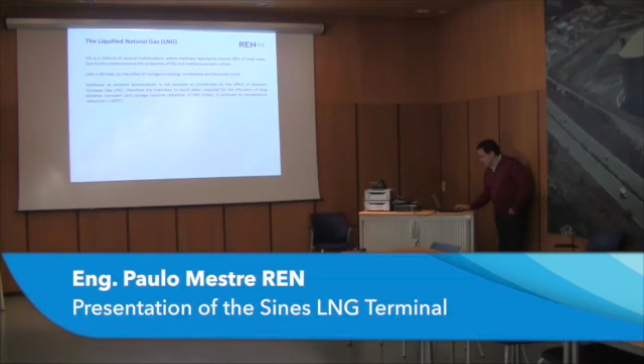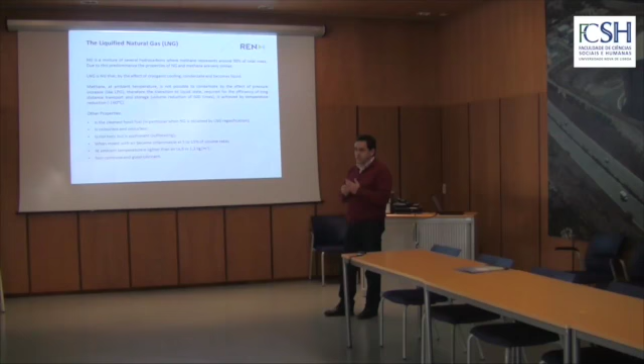Okay, so in this presentation I start here with these slides about the natural gas. Namely, what is natural gas? Basically, natural gas is a mixture of hydrocarbons, where methane represents about 90% of the total mass of this mixture. Then we have ethane, about 5%, and then all the others are around 1%.

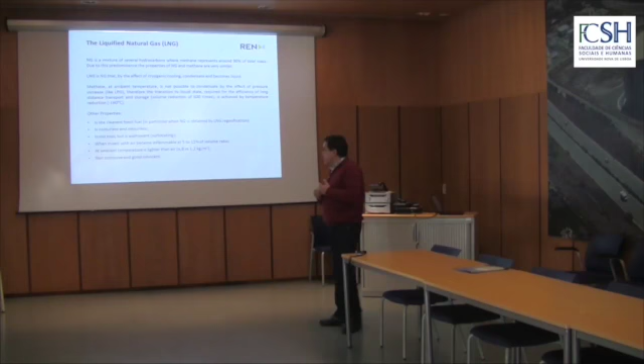LNG is the natural gas that, by the effect of temperature reduction, becomes a liquid, so it's in the liquid state. Methane at ambient temperature is very difficult, almost impossible, to condense. We would need a very high pressure, above 300 bar.

So the way we have to put this mixture, the natural gas, in the liquid state is by the reduction of temperature. We do this to have an effective way to transport and store it. Because when we put the gas in the liquid state, the volume reduces about 600 times, which is much more effective for storage and transport.

Other properties: it is the cleanest fossil fuel. It is the one that, in terms of emissions of CO2, particles, and NOx, has the lowest emissions. And in particular when the natural gas is obtained from LNG, because the liquefaction process removes some of the contaminants that we have in the natural gas that comes by pipeline.

It is colorless and odorless. It's not toxic, but it is asphyxiant. That is, if we have this gas in such a concentration that it removes the air that we have to breathe, then we can asphyxiate with this gas. When mixed with air, it becomes inflammable. The ratio is about 5 to 15% by volume.

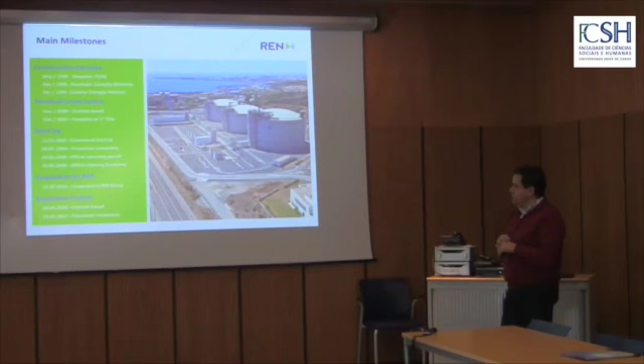Then, in the beginning of 2006, we put in the Portuguese law a European directive related to the unbundling. And this European directive stipulates that the companies that have assets of natural gas, terminals, pipelines, underground storage, cannot have the commercial activity in the same company. So at that time, we were segregating from the company that had the commercial activity. The commercial activity stays in the Galp group, and we were bought by REN, and since then, that was in the end of 2006 in September, we moved to the REN group, and we are in the REN group since then.

More recently, in 2009, we make an expansion of our facilities, so we have another construction project, an expansion. You can see here in this picture, the original project was these 2 tanks and this process area that we have near the 2 tanks. In the expansion project, we built another tank, the 3rd tank, and this process area that is also near the 3rd tank. Basically, it's like building a terminal in parallel to the existing one. It was also a project of 3 years, so we end this project, the provisional acceptance, it was in 2012. Okay, so this is a little bit about the milestones of this facility.

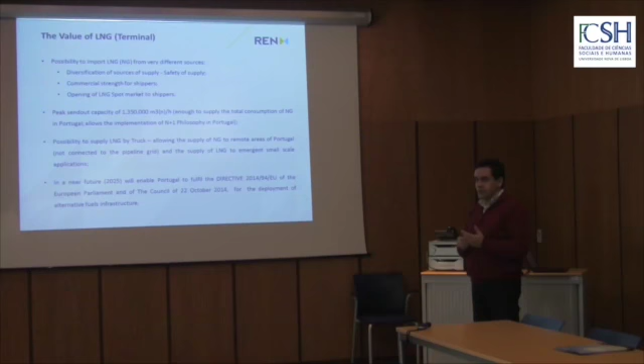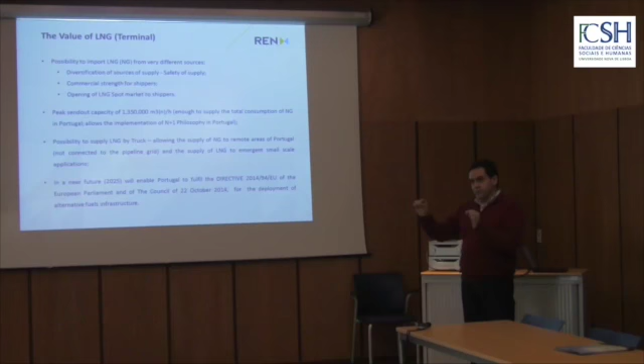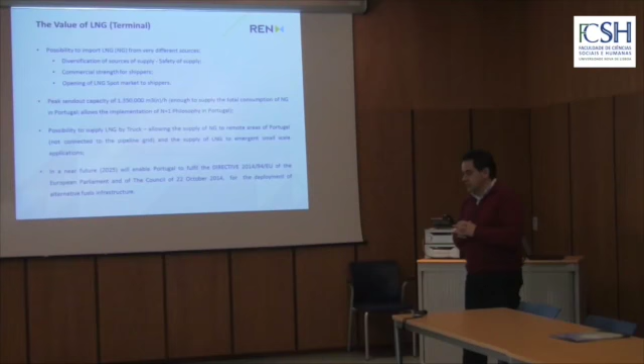Referring a little bit the value of the LNG and the value of this plant for the Portuguese natural gas system. Before the terminal, we have one producer that is connected to the Portuguese system. So we are connecting a producer to a consumer by a pipeline. So this system, it's very weak, because if we have some problem in this system, we compromise the supply of natural gas to Portugal.

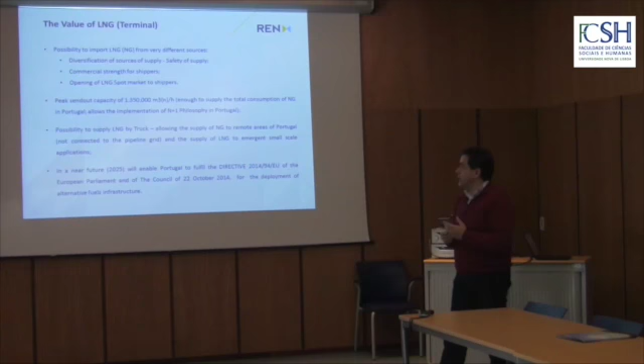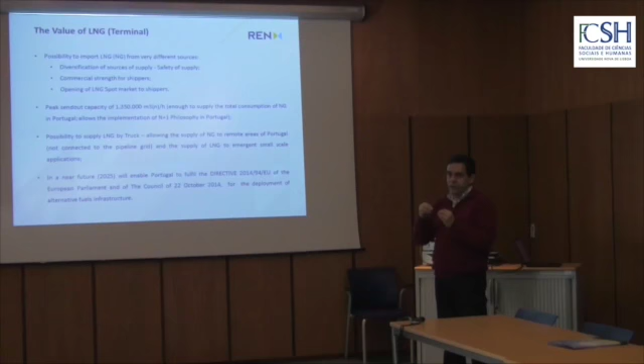With the terminal, we create a new entrance of natural gas in the country, with the particularity that we are no longer linked to a certain producer. We can import natural gas in the liquid state from whatever source. We can go to all the sources of the world, because usually the composition of the natural gas is very similar around the world. And in Portugal, we have our spec, that is what limits the gas that we can put here in the terminal. It's a little bit wide, so we can receive natural gas, I would say, from any source of the world. And by doing that, we are diversifying the sources of supply, and we are increasing the safety of supply.

This is also very important for our shippers. The shippers are the people that have the gas. We are not the owners of the gas in this plant. The shippers are the ones, like Galp and Endesa, that bought gas in the market and put the gas here in the terminal. This is also very good for them, because in the past, they are limited to one source. We only have one source. So you can imagine that in commercial terms, this is not very good, because if I need to buy something but I only have one supplier, this is not good for me.

With the terminal, my shippers can go all around the world to make the business, they can buy gas in whatever source. So they have the power to negotiate the prices of the gas. They also have the possibility to go to the spot market to buy gas in this spot market. And usually the prices of the spot market are lower than the prices of the long-term contracts. And by doing that, we create a way to have gas at a cheaper price here in Portugal.

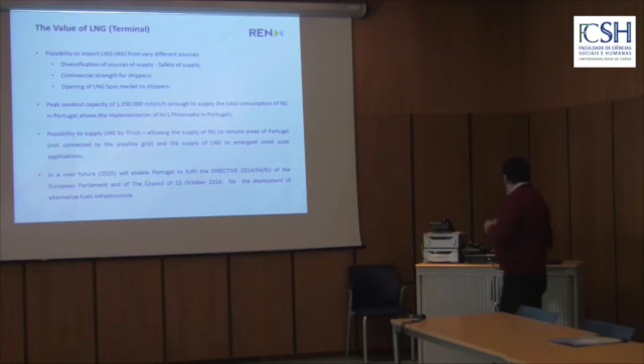This possibility also prepares the country for these new markets that is the small scale. So these are new ways to consume natural gas, namely the transports: heavy trucks by road, or the maritime transport that can consume the natural gas in the liquid state. But this is also applicable to any other possible solutions that are related with this new market of the small scale.

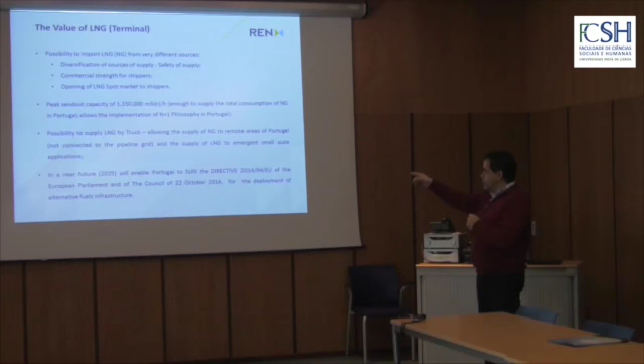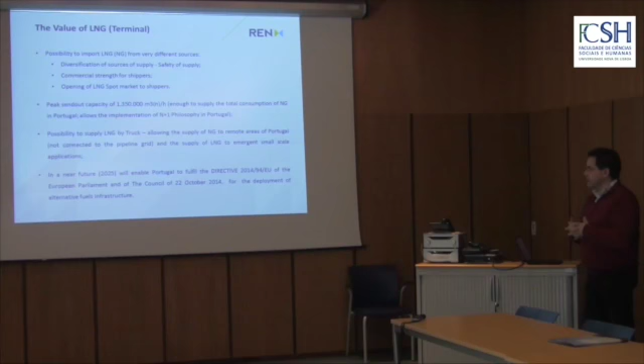Another important feature is that in the near future, this is for 2025, we will enable Portugal to fulfill this directive, the 2014/94, that stipulates the deployment of alternative fuels infrastructure. Namely, what it states is that in Portugal we should have capacity to supply LNG to power the ships and to power the heavy trucks on the road. On the roads we should have these filling stations no more than 400 kilometers apart. In the ports we should have the main ports with the capacity to supply LNG as bunker fuel for the ships.

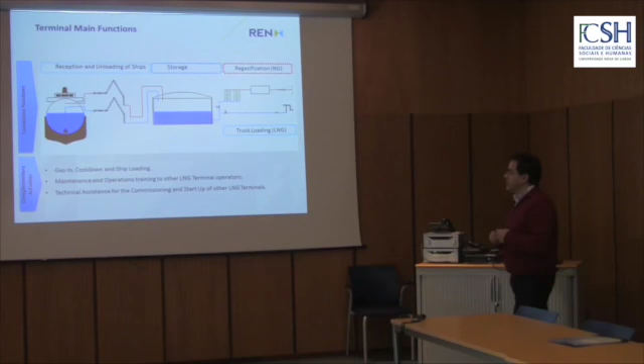In terms of the functions of the terminal, what are we doing here? Well, this is a regulated company, so we operate under the terms of a concession, and that concession stipulates the functions, what I call the concession functions. So it's the reception and unloading of ships, the storage, and the regasification to the grid. I add to the regasification the loading of trucks. This is also related with the concession.

Let me tell you that the storage here is not a strategic storage. This is only an operational storage. It's just to allow the continuous emission to the grid, because here we operate 24 hours per day, 7 days per week. So we need to have the capacity to put the gas in the grid continuously, but we are only receiving ships every 2 weeks or so. So we need to have storage to enable this operation.

More recently, we also implemented other activities that we call the complementary activities, like the gas in, cool down, and ship loading. Ship loading is the opposite of ship unloading. So basically, it's putting LNG that was in our tanks into a ship. We also perform some maintenance and operations training for other LNG terminal operators, and we also give some technical assistance for the commissioning and startup of those terminals.

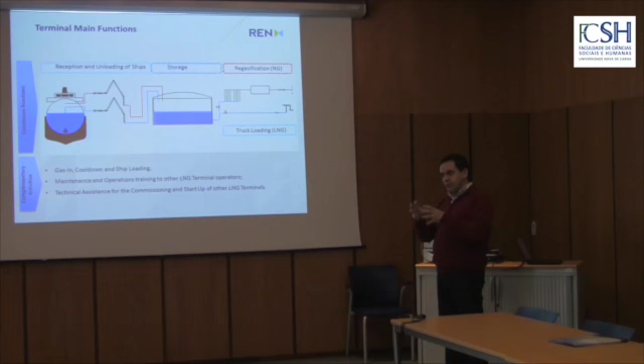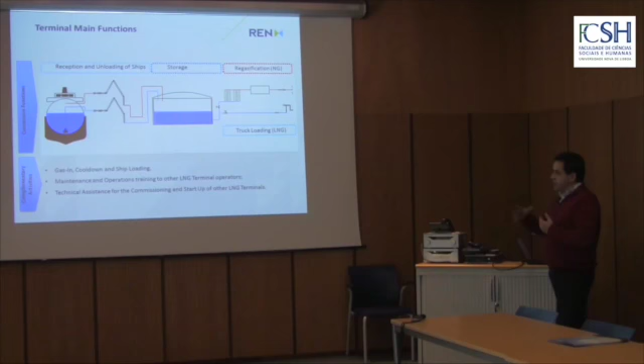This is something that after 2008, the first natural gas crisis of Ukraine, when Ukraine shut down the valves, most of the European countries decided to create a backup solution for their countries. And the solution that they had was to install LNG terminals. And we see LNG terminals being erected in the Netherlands. The European countries that have LNG terminals decided to build more terminals, like in France, in Spain. A lot of projects after that year appeared in Europe, and we gave this assistance.

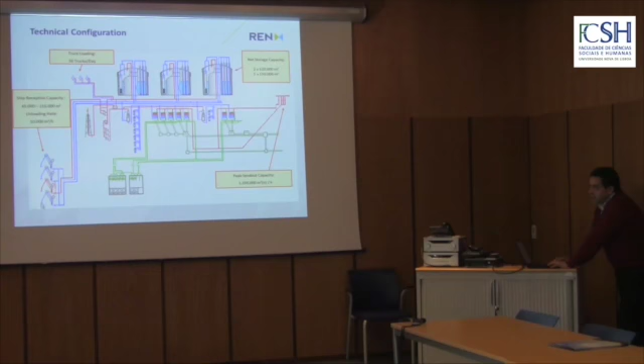In terms of process, let me just give you here a brief explanation of what the process is. So the unloading is quite simple. Basically we connect these equipments to the ship, 4 unloading arms, 3 are dedicated to the liquid transfer, and 1 for the vapor return. So we put here the ship, we connect the equipments, and we make the unloading to the tanks.

Well, this is not as simple as I'm telling here. The people of operation know much more about this than me. But this is done with a lot of attention to the characteristics of the cargo, the characteristics of the LNG that we have in the tanks. We decide if we make the transfer by the top of the tank or by the bottom. And all this process is much more controlled. This is not open the valve and go ahead.

Okay, in terms of storage, we don't need to do much. It's just to monitor the condition of the product that we have there. We have ways to monitor the characteristics of the LNG that is stored, namely to check if we have certain characteristics that indicate that we are having stratification in the tanks. Usually in our case, we never face this problem because the rotation of the LNG in the tanks is very, very fast, and we don't create the conditions to have this stratification. But anyhow, the operations monitor the conditions of the LNG to check if that is occurring or not.

And then the send out, the emission to the grid. Basically what we do here is the following. We pressurize, just a reference, the product in the tank is very near the equilibrium, okay? Especially the top of the tank, this layer that is here on the top, I would say this is really near, or at a certain point it is in equilibrium, like we saw before in this small vessel. But at the bottom, because we have here some hydrostatic column, we have already some pressure. So at the bottom, we should have already the liquid a little bit subcooled.

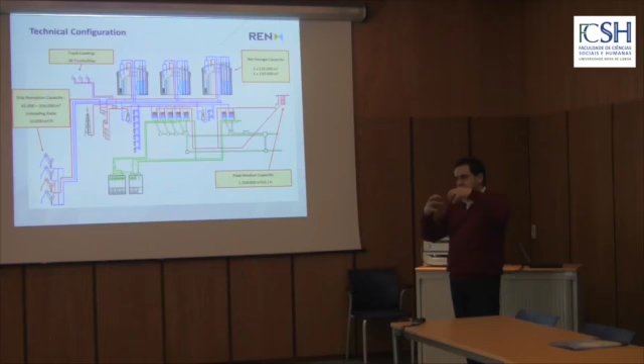Basically what we are doing here is we mix the subcooled liquid with the superheated vapors, with the parameters properly controlled in such a way that at the end of this recondenser, we get a liquid a little bit subcooled. Basically, this recondenser, I would say, is like having an open rack heat exchanger. All the fluids, liquid and vapor, are going to join at the top of the vessel. They are going to pass across a mesh of metal that is there. The liquid cools down the metal, the vapor condenses on the same metal that is cooled. And at the end, we should have these two fluids getting only liquid.

Okay. At the bottom, we have here liquid. We pressurize it again a little bit more with these pumps. At this time, we are going to put the product at about 90-95 bar. At the end of the pumps, we already have enough pressure to put it in the pipeline. But the product is still a liquid.

What we do at this stage is to put the product in a heat exchanger, and the product is going to receive the heat from the seawater. Basically, we are pumping seawater from the sea. We are putting the seawater in this heat exchanger, and the seawater will transfer the heat required to make the regasification and the warming of this gas, in such a way that at the end of the heat exchanger, we have the product at enough pressure and with the right state, it's vapor, it's gaseous, and with the right temperature to put in the pipeline.

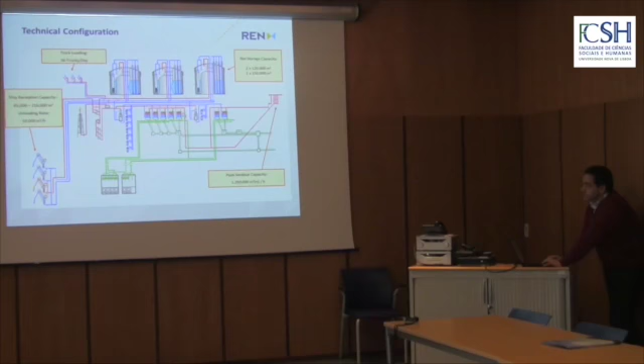So I would say that the pipeline starts here at the end of the vaporizer, at the outlet of the vaporizer. So here we have a gas line that is going to interconnect to the Portuguese natural gas grid. The only thing that we are still missing is to make the accounting in terms of volumes and in terms of composition, what we are putting in the grid.

So we measure volumes in the flow meters, turbine and ultrasonic, and then we measure the composition of the gas with a chromatograph, and we make the product of the volumes by the calorific value that we can calculate from the composition, and we get the amount of energy that we are transferring to the grid. The balance here in the plant is done by energy. Okay. So this is basically what we do here.

I missed the loading of the trucks, but the loading of the truck is very simple. It's just from the low pressure circuit, we feed the truck loading station. So we load the trucks at a very, very reduced pressure. And again, we have the return vapor from the tanks to interconnect to our boil-off gas system.

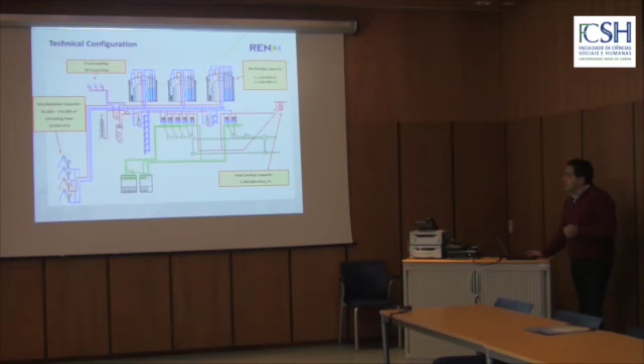Okay. A diagram about the tanks. The tanks that we have in the plant are what we call the full containment tank. It's like having two tanks, one inside the other. The product is contained in this metallic tank, what we call the inner tank. It's a metallic tank with 30 millimeters, 9% nickel steel. And then we have the insulation. We have here perlite, we have here foam glass, we have here at the top rock wool. All the system is insulated.

And on the outside of the insulation, we have another tank of concrete that is able to contain the liquids if we have a leak on the internal tank. This one is concrete. Well, they also have a layer of carbon steel, but okay, it's a concrete tank. This concept creates a tank that is very safe because it's like having two tanks. If we have a problem in one tank, the product can be contained by the outer tank.

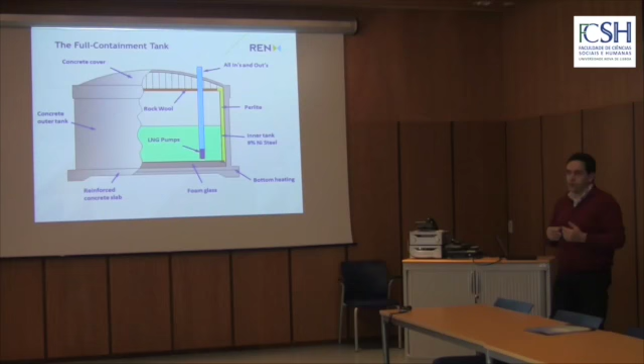I don't know if you have already seen it, but sometimes you have the water freezing in certain conditions, and then in certain conditions it melts, and these cycles work like that. The water can ingress in the cracks of the concrete. When the water freezes, it expands and increases the crack. And then when it melts, it goes a little bit more and creates a process that in a small period of time, a few years, can destroy the foundations of the tank. To avoid that, we have this bottom heater.

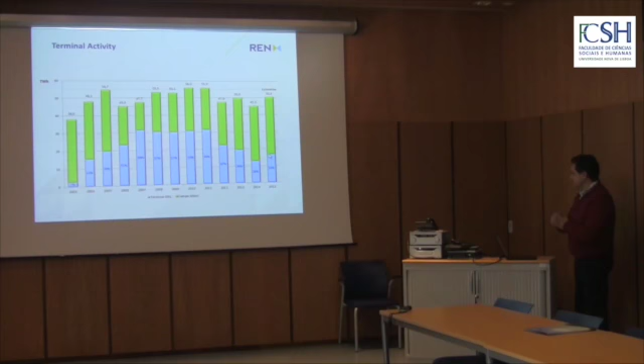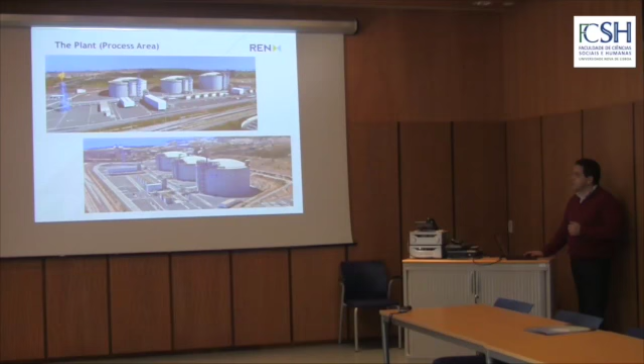Okay, and then, just to finish, some pictures about the terminal. We have here the jetty, where we berth the ships, and the process area. It's jumping off. Sorry. This is not the sequence. Okay, but this is the process area. This is the jetty, and this is an overview of the terminal.

Okay, do you have any questions, any doubts? We saw that you have loaded more or less 6 ships here, right? Loading activity. Yes, I didn't mention it too much. I would say the following. In the last years, yes, we have more or less 6. I believe that in the next year, we should lose this activity. Do you know the destination of those ships? Yes, mainly we load these cargoes to Brazil and Argentina. Mainly Brazil, Porto Pecém, I think so. But this is not a normal activity, because here we don't have any source of natural gas, so we should not export.

But this was a business opportunity that was created due to the high prices of natural gas in the market, and due to the fact that the shippers that put gas here have the option to feed our grid in 2 ways: the pipeline or the terminal. So what they saw here was a business opportunity because the LNG in the international markets was at a very high price, and they can export the LNG. The gas that is coming from the pipeline, the price is fixed because it's a long-term contract, and they cannot export this gas. So they decided to feed the Portuguese system with the pipeline gas and to use the quantities available in the long-term LNG contracts to sell in the international market.

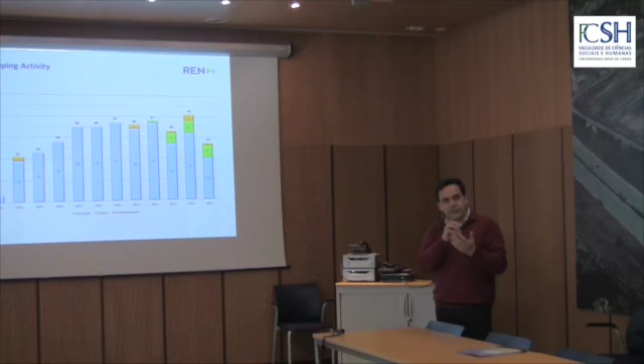But at the beginning they had a problem. I don't know the details of the contract, but I believe the contracts had a destination clause. So they cannot resell the gas directly with the same ship, telling the guy of the ship, hey, you are not going to discharge in Portugal, you go to Brazil. No, they cannot do that. Later, I think they negotiated this clause, and they did something different. But at the beginning, they put the gas here with 1 ship, then they found another ship and transported the gas to Brazil, and by doing that, they avoided the destination clause of the contract. Now the prices of LNG are dropping. I believe that for the future we are going to lose